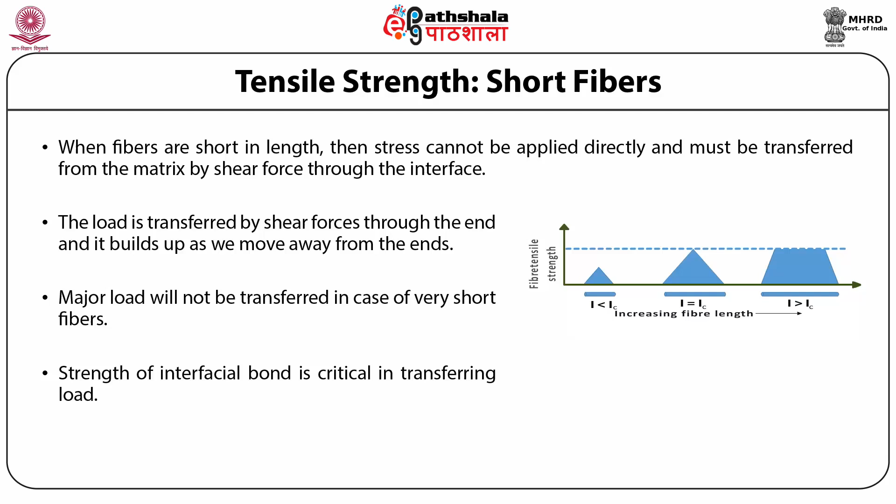The length of the fibers must be long enough that the load can build up to its full capacity. This is explained schematically in this figure, where the minimum length requirement for the fibers to carry full load in the composite has been illustrated.

Continuing our discussion on the tensile strength of short fiber composites, the average stress in a fiber can be given by sigma F bar equals sigma F multiplied by (1 minus LC by 2L), where sigma F is the fracture strength of the fiber and LC is the critical length of the fiber.

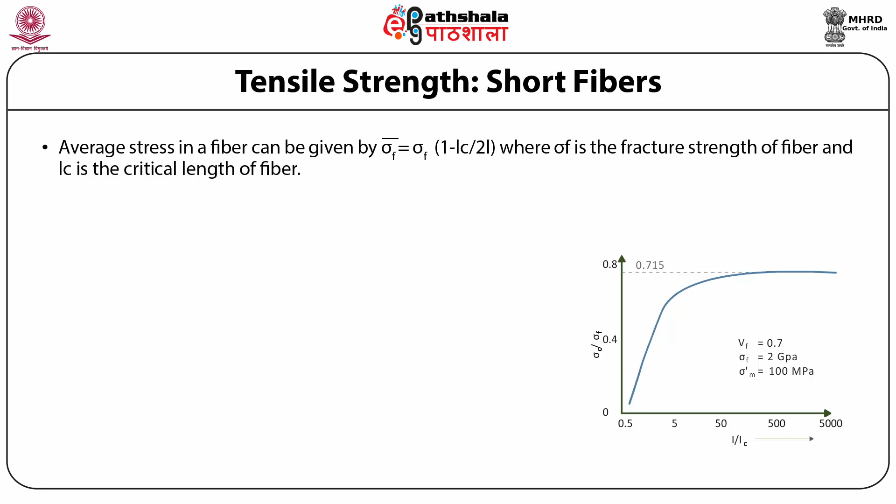The composite strength based on this average stress can be given by sigma C equals sigma F times VF multiplied by (1 minus LC by 2L), plus sigma M prime multiplied by (1 minus VF).

Now the figure shown represents the variation of the efficiency of strengthening, that is sigma C divided by sigma F, with change in average length of fibers. It is obvious from the plot that 95% of the strength of continuous fiber composite can be achieved in short fiber composites with fibers only 10 times as long as the critical length.

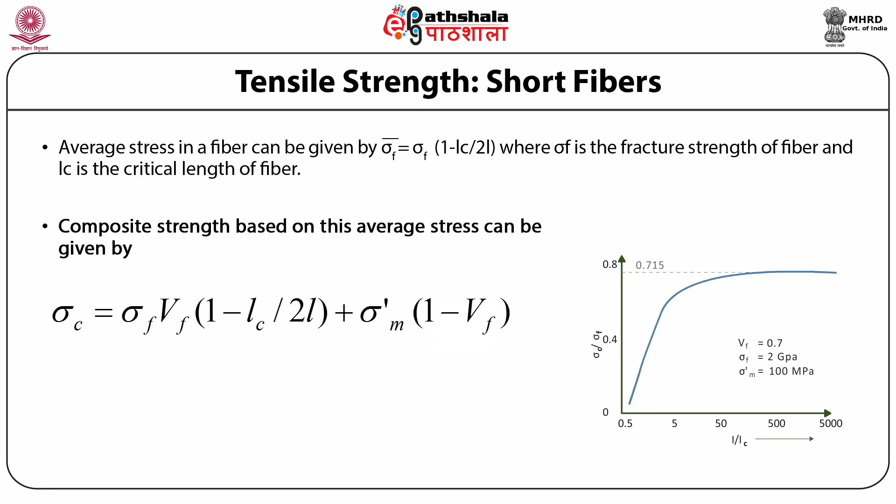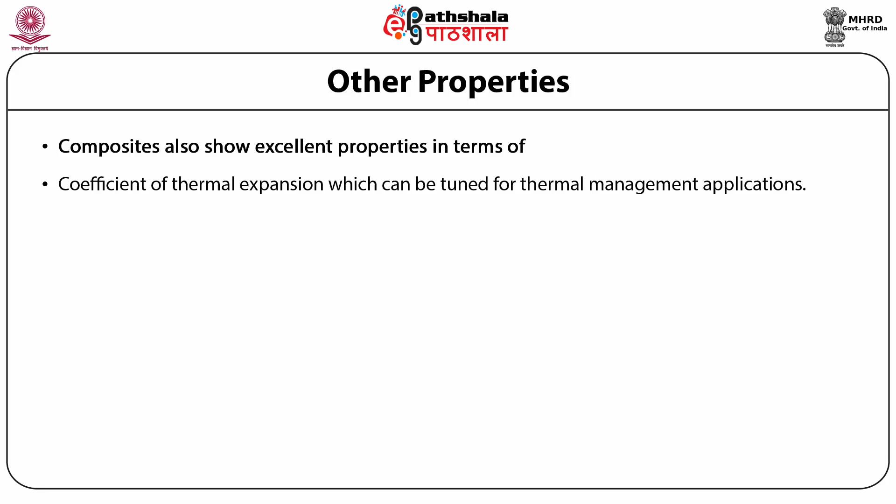Now let us discuss various other properties of composites. Composites show excellent properties in terms of, first, coefficient of thermal expansion, which can be tuned for thermal management applications; second, stiffness, which also results in high resistance to mechanical and thermal distortions.

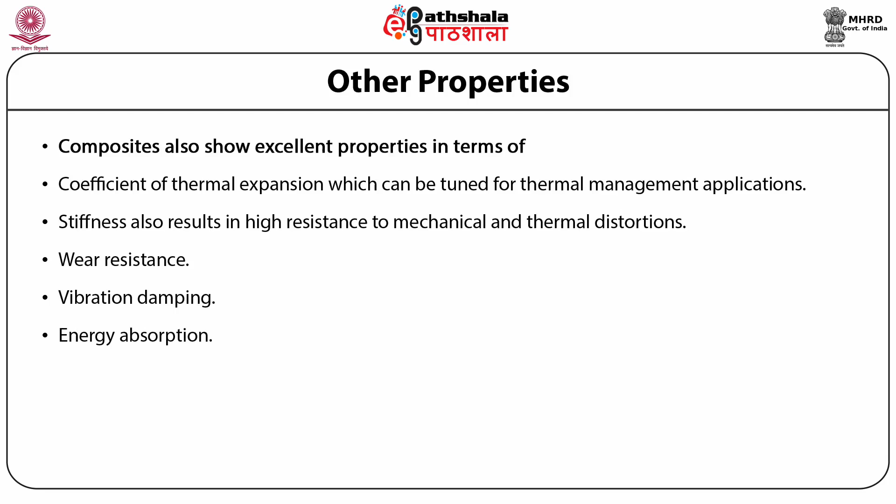Third, they have excellent wear resistance. Fourth, vibration damping. Fifth, energy absorption. Sixth, they have the advantage of self-cleaning or self-lubricating properties. They also have high thermal conductivity and high temperature strength.

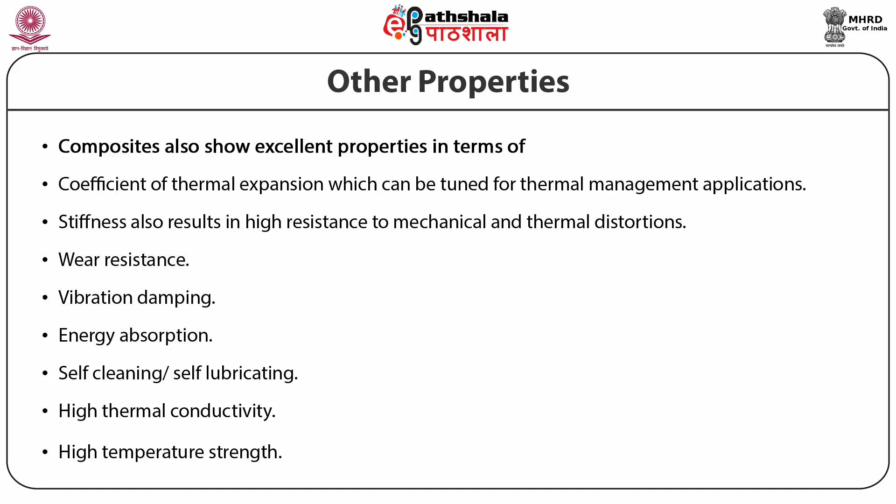So students, till now we have discussed the tensile strength for various composites. Now let us discuss those composites which are commercially relevant. We will be discussing commercially relevant composites.

Cermet is a composite containing a metal matrix and ceramic reinforcement. There are two main classes of cermets, and these are cemented carbides and oxide-based ceramics.

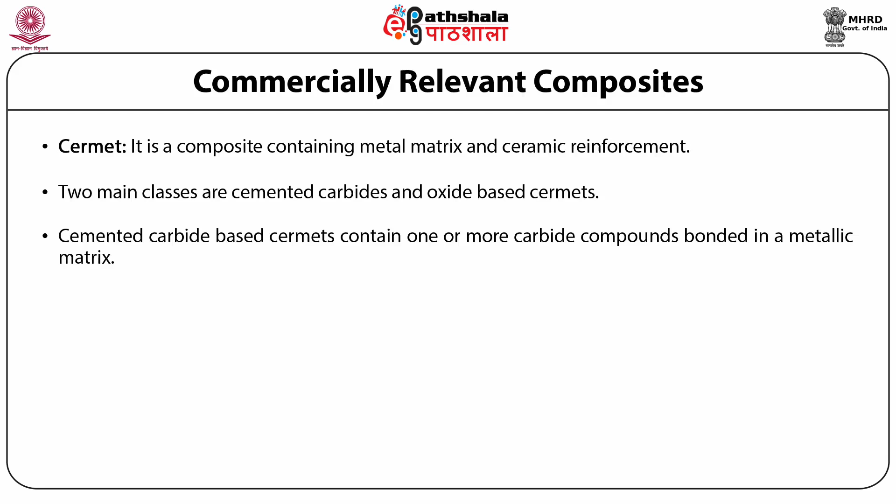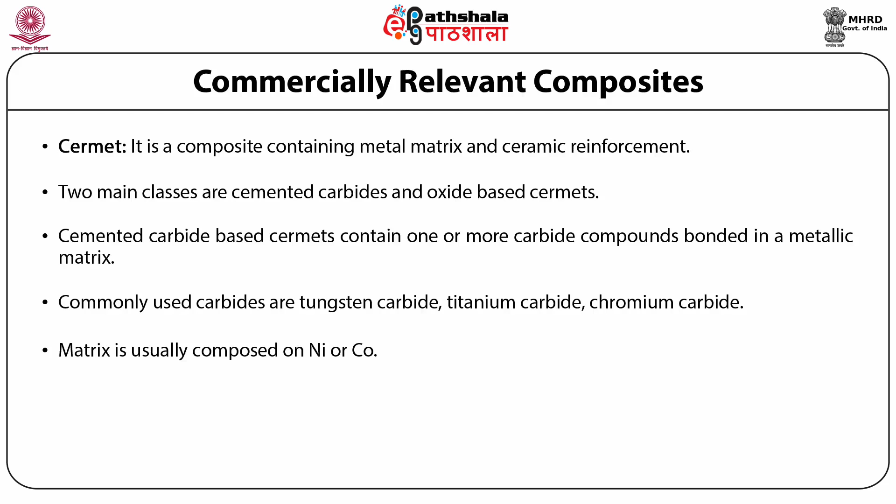Cemented carbide-based cermets contain one or more carbide compounds bonded in a metallic matrix. The commonly used carbides are tungsten carbide, titanium carbide, and chromium carbide, and the matrix is usually composed of nickel or cobalt. These are commercially relevant composites.

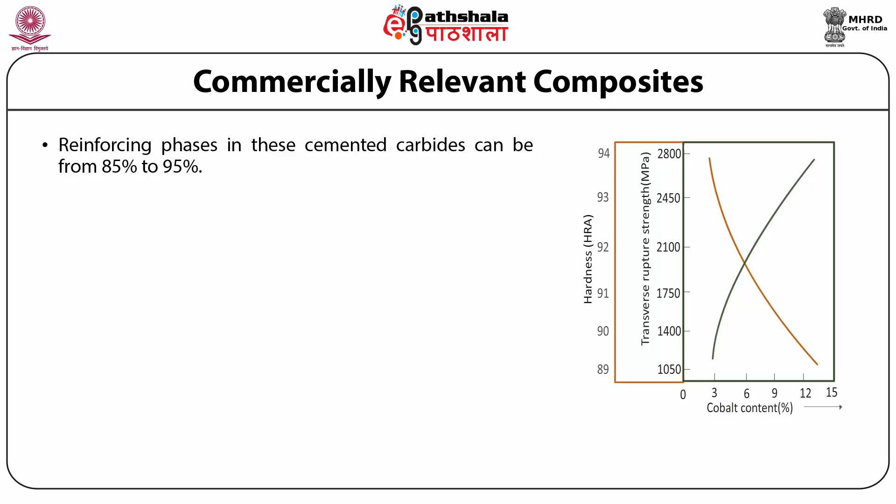The reinforcement phases in these cemented carbides range from 85% to 95%. Increase in the matrix content leads to decrease in hardness as expected, but it also improves transverse rupture strength. Hence, an optimized ratio has to be found based on the specific application.

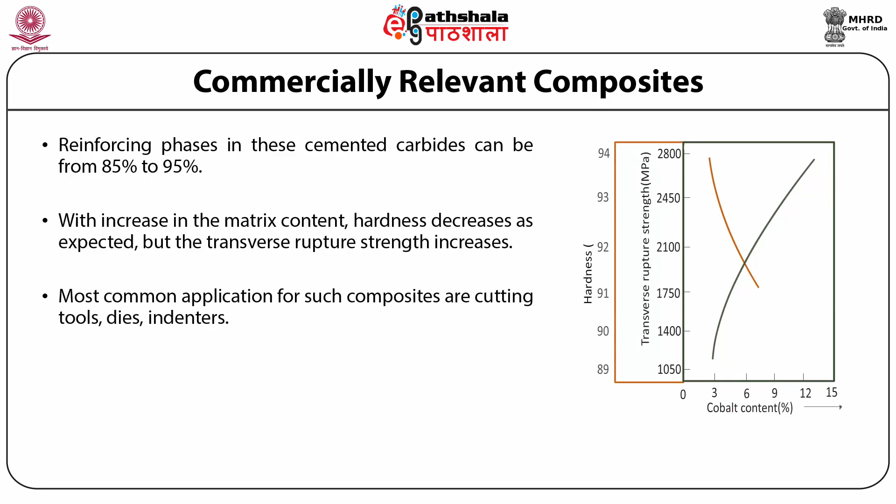The variation of the change in hardness and rupture strength with the change in bonding phase of cobalt is shown in this figure. As we can see, the hardness values are very high, and hence the major applications for such composites are in cutting tools, dies, and indenters.

Now let us discuss some of the commercially relevant composites. We have oxide-based cermets, using alumina (Al2O3) particulates as the reinforcing phase. MgO particulates are also used. The matrix is usually composed of chromium. Applications include cutting tools, mechanical seals, and thermocouple shields.

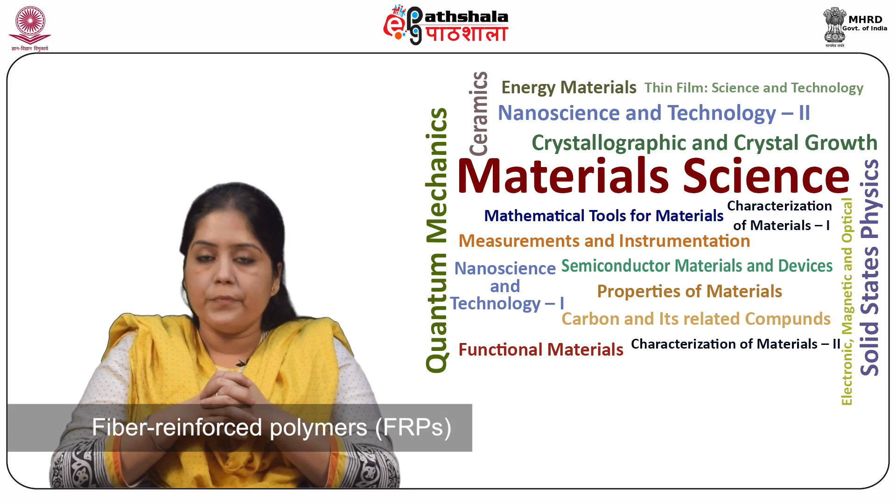The fiber reinforced polymers, or FRPs, are another commercially relevant composite made out of a polymer matrix embedded with high strength fibers. The thermosetting polymer is usually used as the matrix. Fibers are usually made of glass, carbon, or Kevlar, depending on the strength required and the economics. Other commonly available fibers are boron, silicon carbide, alumina, and steel.

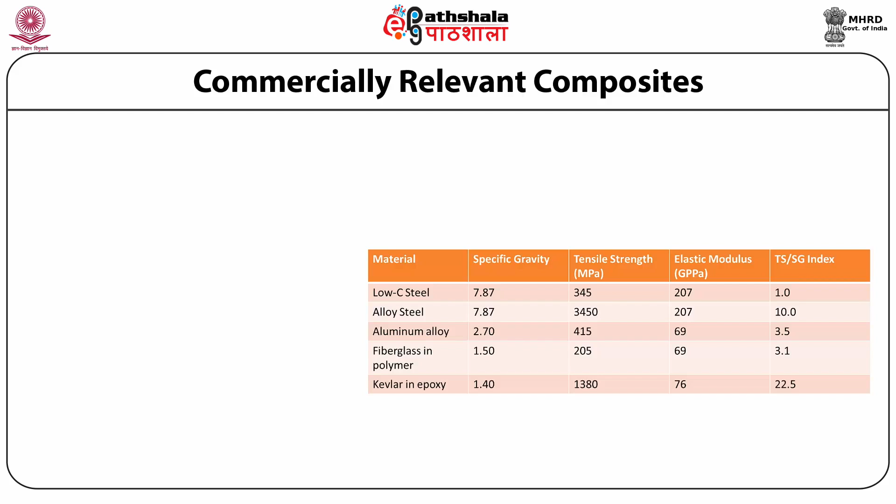In some FRPs, that is fiber reinforced polymers, there is more than one kind of fiber used. FRPs are mainly known for their high specific strength and high specific modulus.

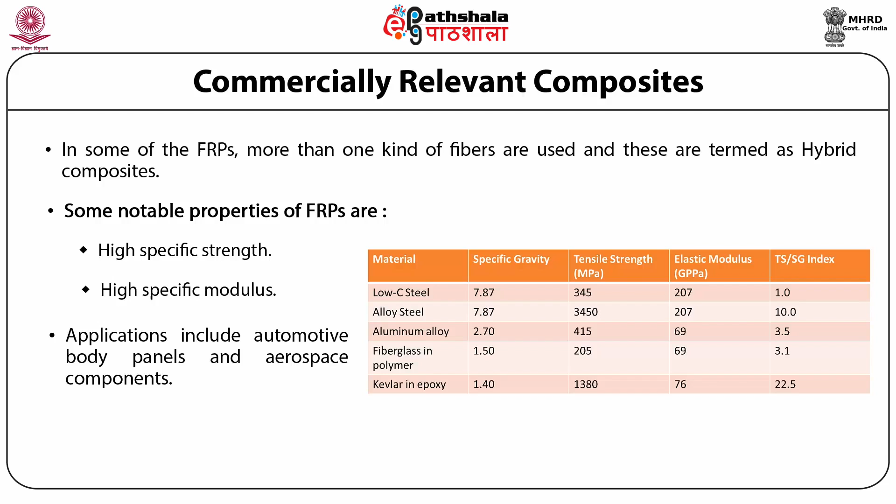This table compares the properties of some common fiber reinforced polymers with other structural materials, based on four parameters: specific gravity, tensile strength, elastic modulus, and TSSG index. Because of their high specific strength and specific modulus, fiber reinforced polymers are common in a wide range of applications, ranging from panels for some equipment to panels for automotive bodies and aerospace equipment.

Till now we have discussed commercially relevant composites. Now let us focus on technically relevant composites, and the kind of composite we are going to discuss is the fly ash composite. Fly ash composites have not been commercially exploited, but they are technologically very relevant.

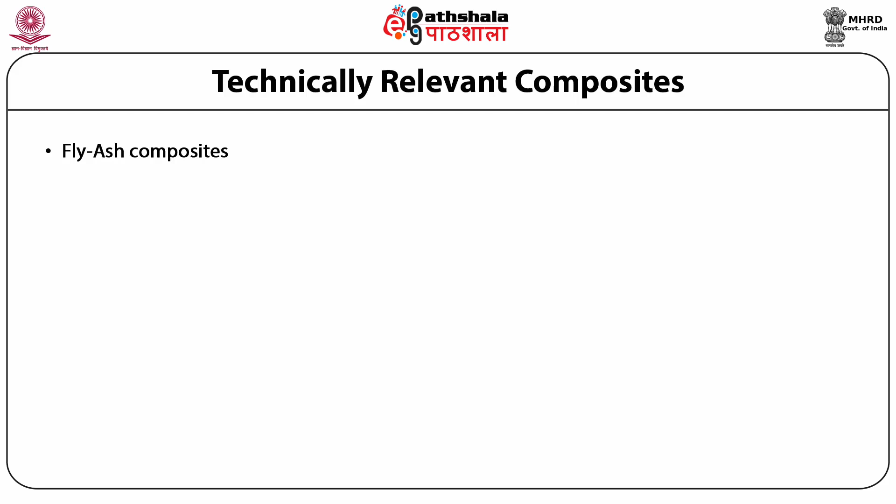Metal matrix with hollow sphere-like structures have low densities and can absorb a lot of energy, acting as energy dampeners. Fly ash is an ideal dispersoid for this purpose, as it is very inexpensive. Fly ash is actually a waste product from thermal power plants and has very low density.

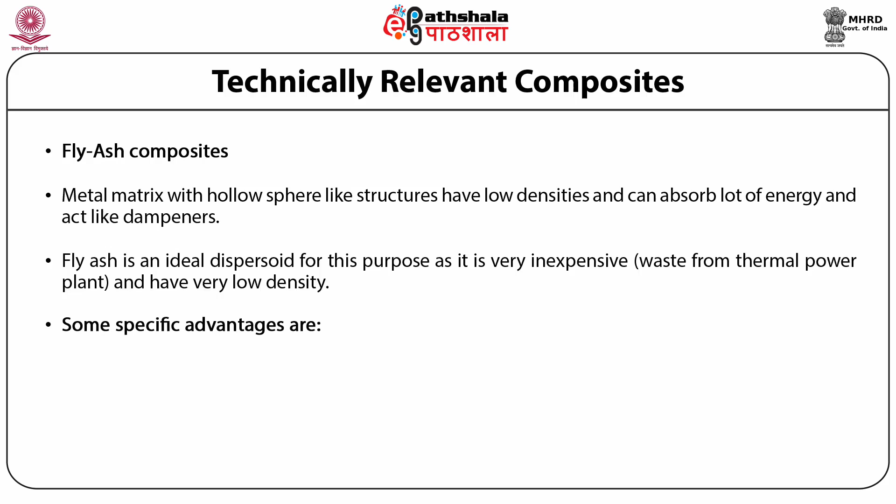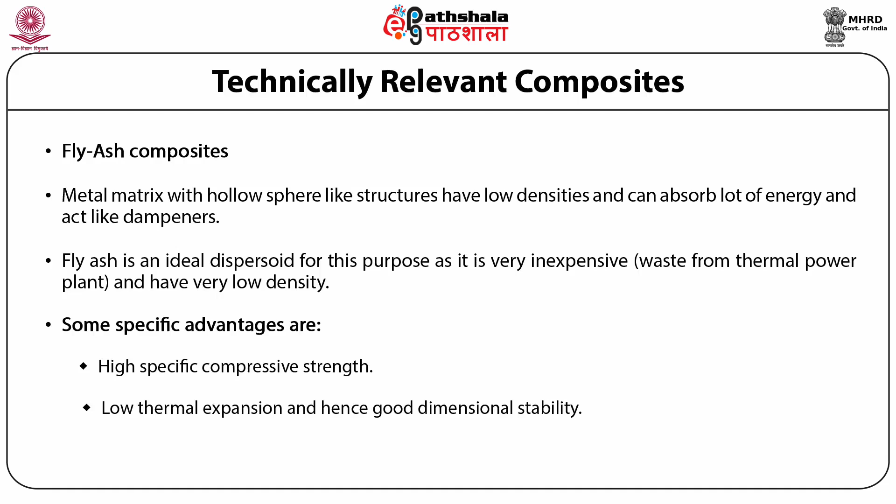There are various advantages of fly ash composites. First, they have high specific compressive strength. Second, they have low thermal expansion and hence good dimensional stability. Next, they have good damping characteristics.

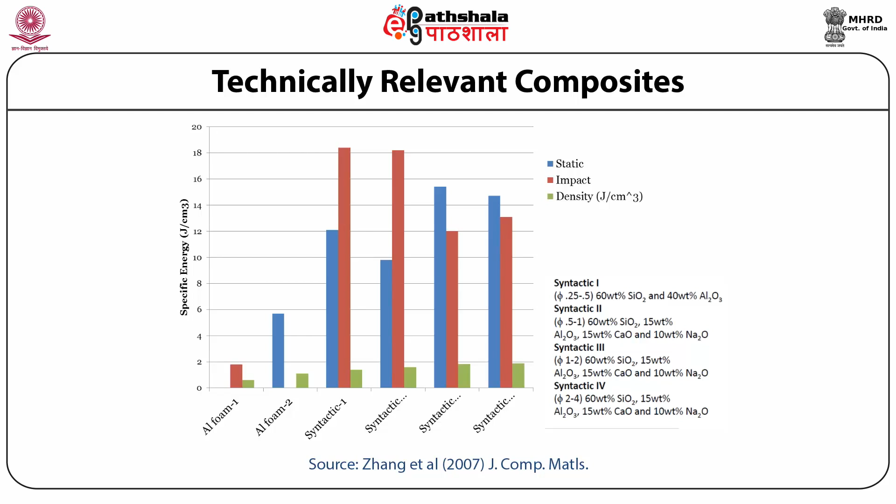Let us summarize what we learnt in this module. The minimum length required for fibers to carry the full load in the composite, along with the variation in efficiency of strengthening with average fiber length, was discussed. We also discussed commercially relevant composites like cermets and fiber reinforced polymers, as well as technically relevant composites, that is, fly ash composites. Thank you.